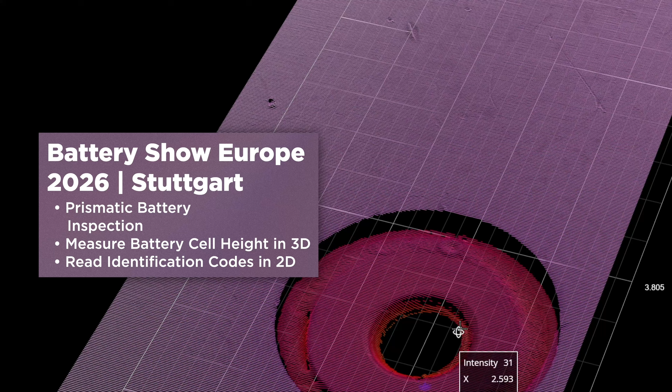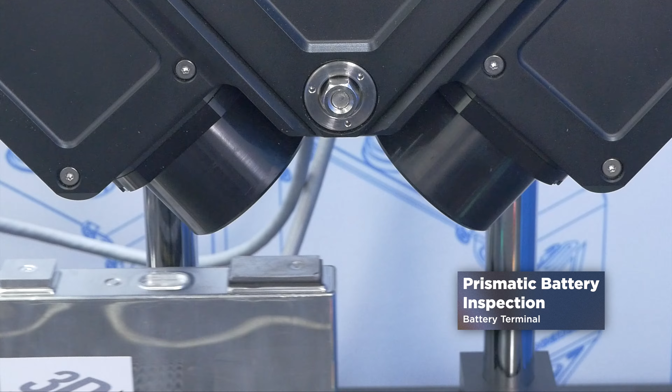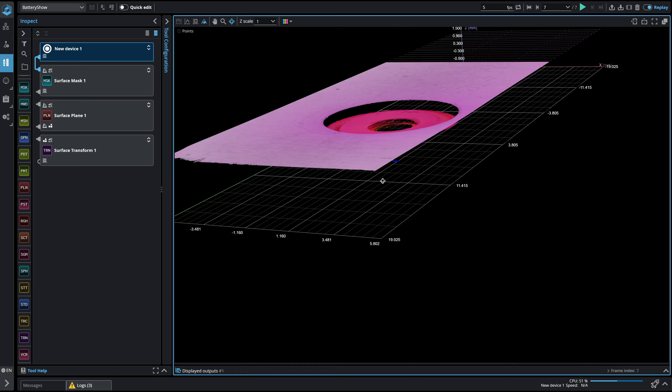Here we're scanning a prismatic battery, especially the terminal. If you're asking yourself what is a line confocal scanner, it's actually a line scanner but with a different technology compared to triangulation. The key points are high resolution and very clean data on shiny surfaces, and that's what we have here as well. We have the terminal, which is a high glossy surface, and with this scanner you can scan the full terminal, concentrate on a particular area, and really look for very tiny small defects, which we are also showing here in our 3D scan right away.

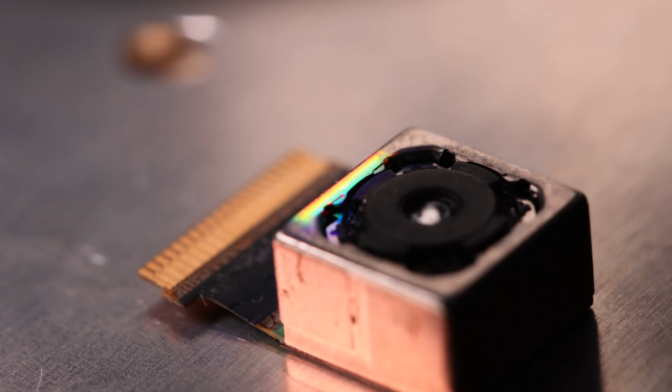Scratches, damages, particles, anything that can be here. But the key point is not only the high resolution and the ability of scanning glossy surfaces, it's also the ability of scanning transparent surfaces. In particular, on this cell, you see in the middle there is this safety valve, covered with a transparent foil. In this case, we are also able to scan this transparent foil. We can inspect if there are damages on the foil, and besides that, also in a second layer, inspect the cover itself of the safety valve.

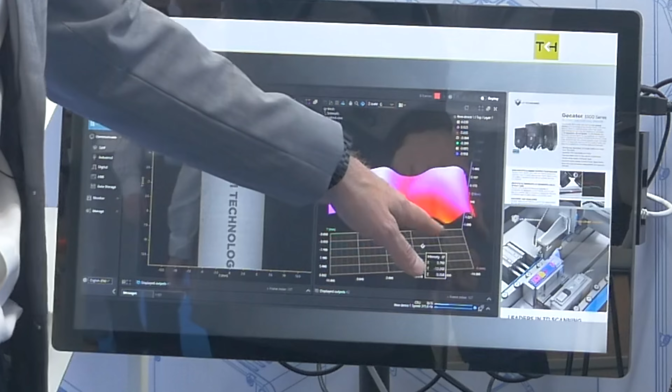So to really highlight the capabilities of our Gocator 5512, I'll showcase a bit different example. It's a sample of our goodies here at the trade show - a carton wrapped with transparent foil. What you see here, we're scanning right now first this wavy area, this wavy surface, which is actually the foil. But below, we can also see right away the printed carton that's on the bottom, so you can actually read what's below the foil. In one scan you get two different data sets.

Transparent glue, transparent paint, anything like this you can actually inspect with the system. So you have both layers, or even 3-4 layers, which you can scan and inspect for defects, or you can do measurements on that. We're happy to discuss with you your samples, your applications.

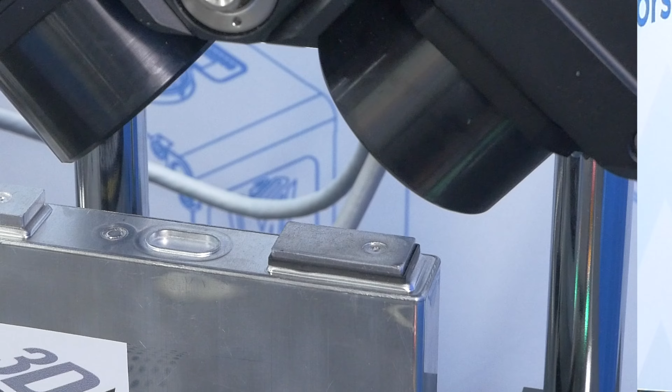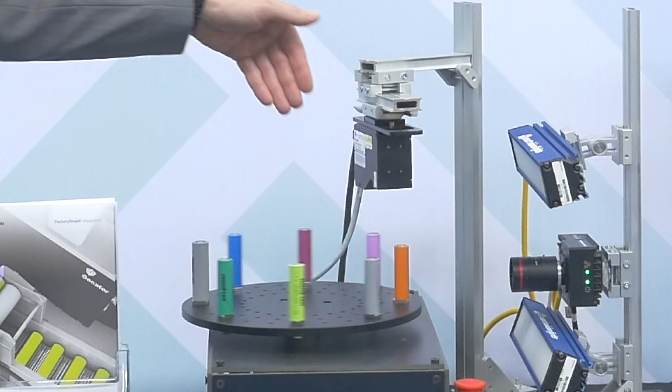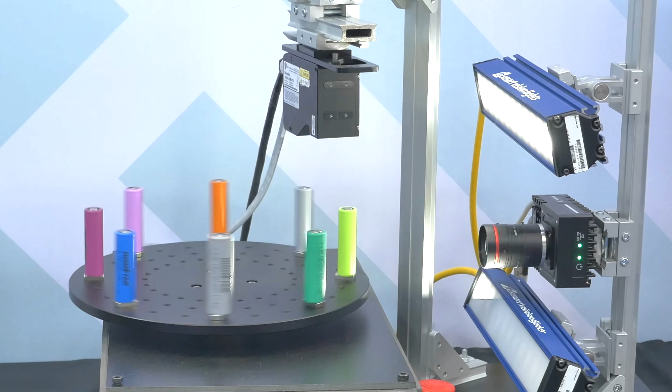We have here our Gocator 2520. It's a line scanner, so we're scanning the top of those cells and measuring the height, so it's a 3D measurement. Besides that, you see our Gocator 2D smart camera, which gets triggered by the Gocator, and here we are looking at the side of the battery cell and reading the OCR. You may ask yourself why we're actually combining these two systems together. The reason is, in some applications you need a 3D inspection combined with a 2D inspection. With our systems we can combine this, and we're still using just one software - this is our GoPxL software, where we integrate 3D scanners with our 2D smart cam, having a full solution with two technologies.

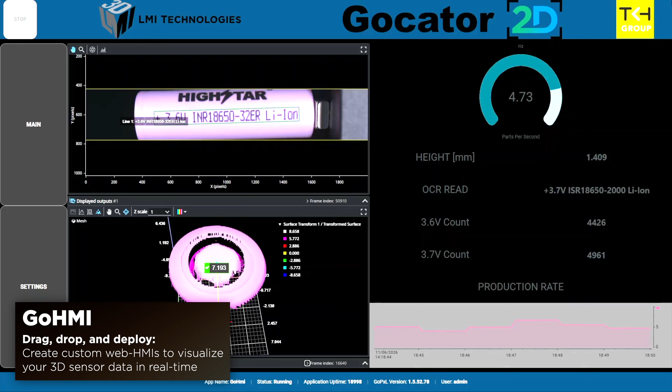Our next valuable feature is our GoHMI software. What does it mean? You have the GoPxL where you can see everything, but sometimes on your shop floor you just need special values, some buttons, or maybe just a graph or a trend. With our GoHMI you're able to customize it for your needs, for your shop floor and for your application.